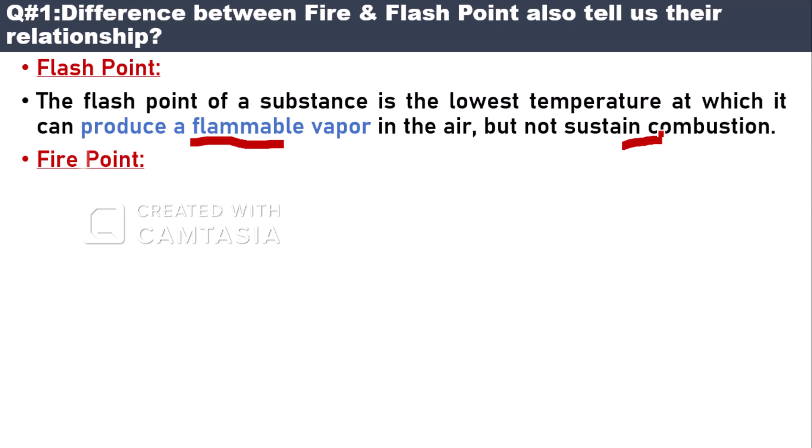The second point is fire point. The fire point is the lowest temperature at which the substance will sustain burning for at least 5 seconds. Over here we just said it will produce flammable vapor, whereas at fire point it will sustain burning for at least 5 seconds after the ignition source is removed.

The second part of the question is, what is the relationship between flash point and fire point? The relationship is generally that the fire point is higher than the flash point, indicating that the substance needs to be heated to a higher temperature to sustain combustion compared to the temperature at which it can produce flammable vapor.

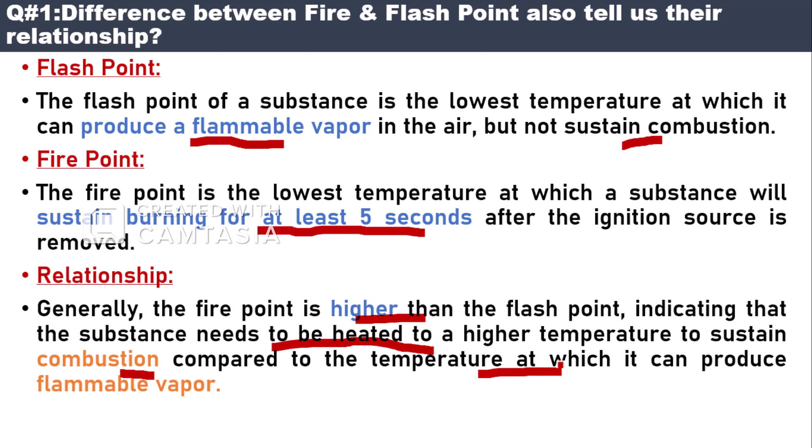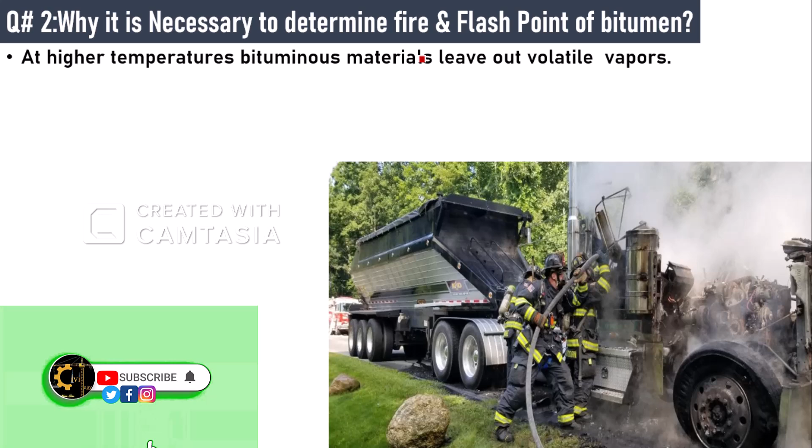Question number 2 was asked from a second person sitting on the panel: why is it necessary to determine the fire point and flash point of bitumen? You will say, sir, it is very important to determine because at higher temperature bituminous materials give off volatile vapors.

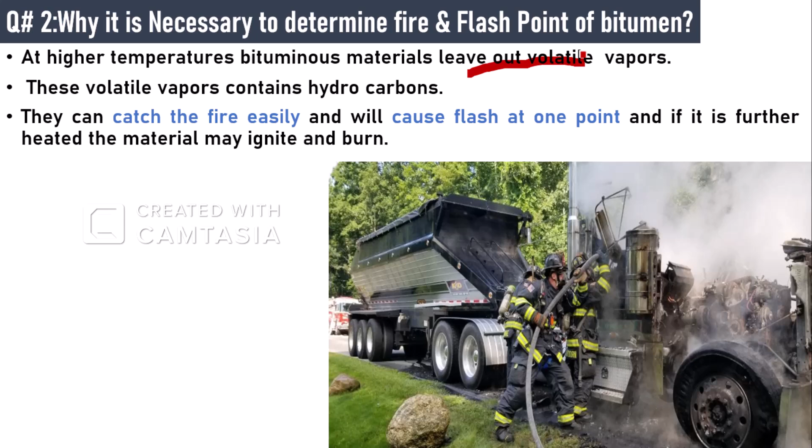These volatile vapors contain hydrocarbons and can catch fire easily, causing a flash at one point, and if further heated, the material may ignite and burn. Catching fire is very dangerous during mixing of bitumen, especially during its application. So it is necessary to recognize the safe temperature values of bitumen grades for mixing as well as for applying. These limiting values of temperature can be determined by conducting flash point and fire point tests on bitumen.

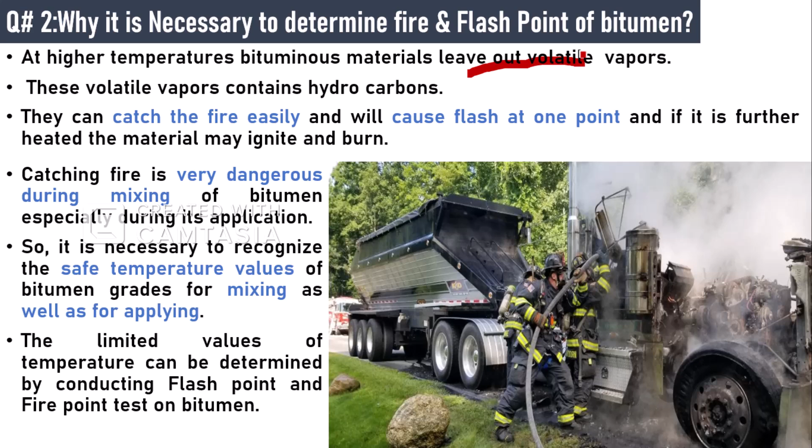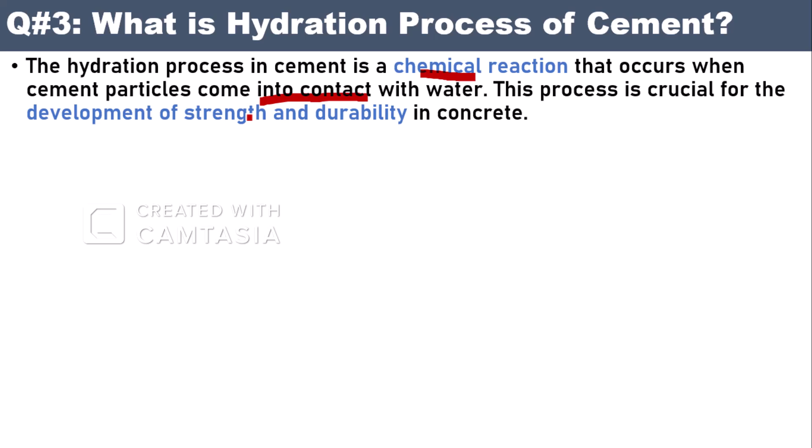Question number 3: what is the hydration process of cement? First of all, you will define what the hydration process is. The hydration process in cement is a chemical reaction that occurs when cement particles come in contact with water. This process is crucial for the development of strength and durability in concrete.

Then there was a question related to this process - question number 4: how does the hydration process help in strength gain? This is a very logical question and you will have to satisfy the person asking it. We will divide this into sub parts.

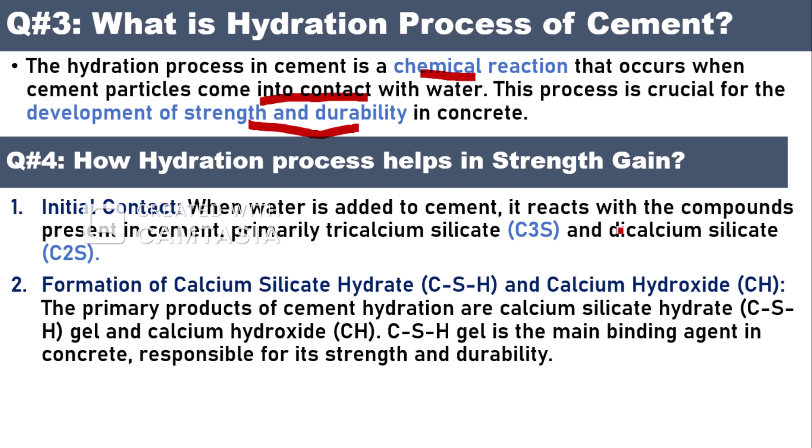The first one is initial contact: when water is added to cement, it reacts with the compounds present in cement, primarily tricalcium silicate and dicalcium silicate. Then there is formation of calcium silicate hydrate and calcium hydroxide. The primary products of cement hydration are calcium silicate hydrate gel and calcium hydroxide. CSH gel is the main binding agent in concrete, responsible for its strength and durability.

Then there is heat generation. The hydration process is exothermic, meaning it generates heat.

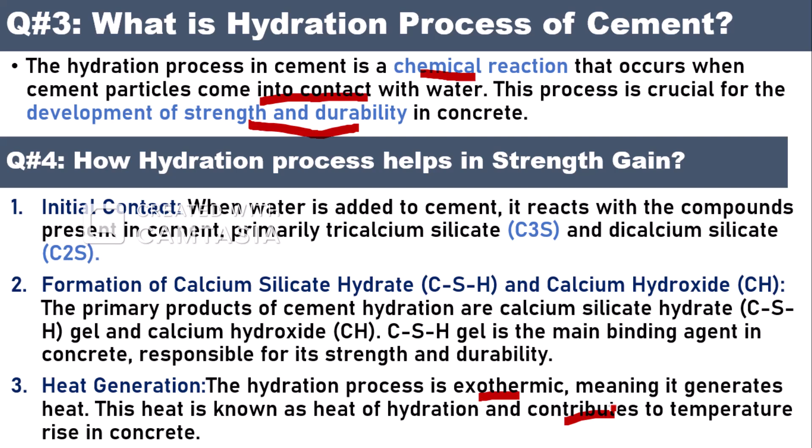This heat is known as the heat of hydration and contributes to the temperature rise in concrete. The fourth step which helps in strength gain of concrete is formation of ettringite. Ettringite has the formula Ca6Al2(SO4) along with calcium hydroxide CaOH2.

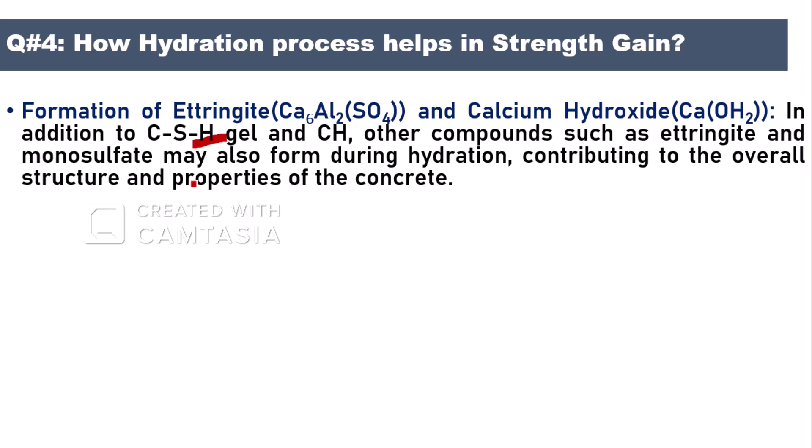In addition to CSH gel and CH, other compounds such as ettringite and monosulfate may also form during hydration, contributing to the overall strength of the structure and properties of the concrete.

Then there is setting and hardening. As hydration progresses, the concrete undergoes setting and hardening, transitioning from a plastic or fluid state to a solid state. This process is crucial for achieving the desired strength and durability of the concrete.

The person asking the question may ask, what is consistency of cement? This could be one of the questions. Consistency of cement refers to the fluidity or stiffness of the cement paste, determined by water content.

It affects workability. Another question asks about soundness of cement, which indicates the cement's ability to maintain volume after setting without significant expansion or shrinkage. It is tested by Le Chatelier's apparatus or autoclave test for durability.

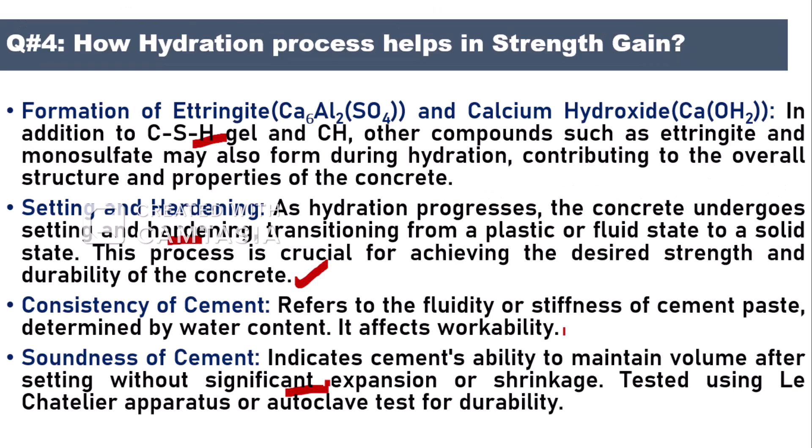The fifth question that was asked from a candidate was, what is an aquifer and its types? First, you will have to define the aquifer. An aquifer is an underground layer of water-bearing rock or sediment that stores and transmits water.

There are several types of aquifers. Then there could be a question: can you define the types of aquifers? So you will say, yes sir.

The first one is unconfined aquifer. This type of aquifer has a water table that is not confined by impermeable layers above it. It is recharged directly by precipitation infiltrating into the ground.

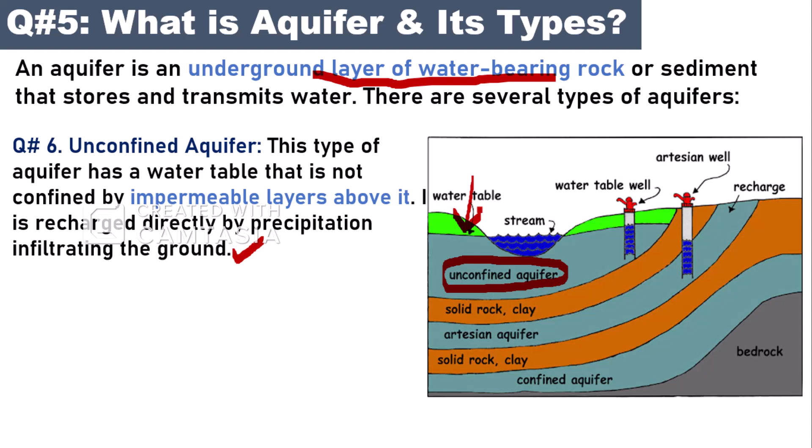Okay, unconfined. Then there could be a question, what are the other types of aquifer? You can say the confined aquifer. Confined aquifers are quite opposite to unconfined aquifers, and these aquifers are sandwiched between impermeable layers.

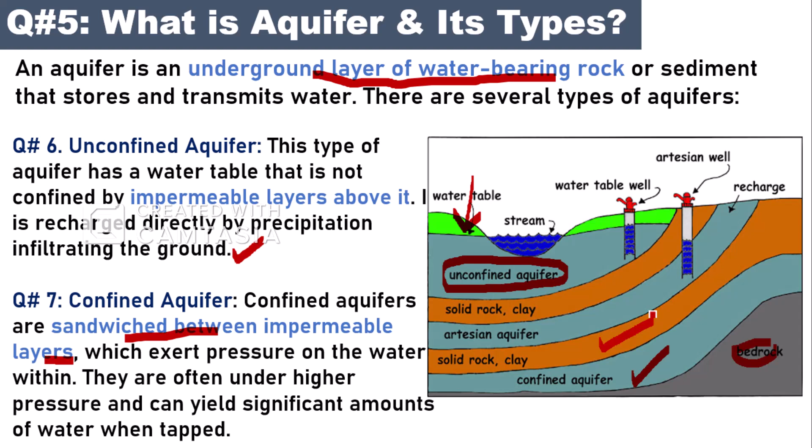As you can see over here, this is a confined aquifer, sandwiched between bedrock, a hard surface, and again there is a hard surface formed by solid rock or an impermeable layer of clay. So it is sandwiched between two impermeable layers - it is called a confined aquifer.

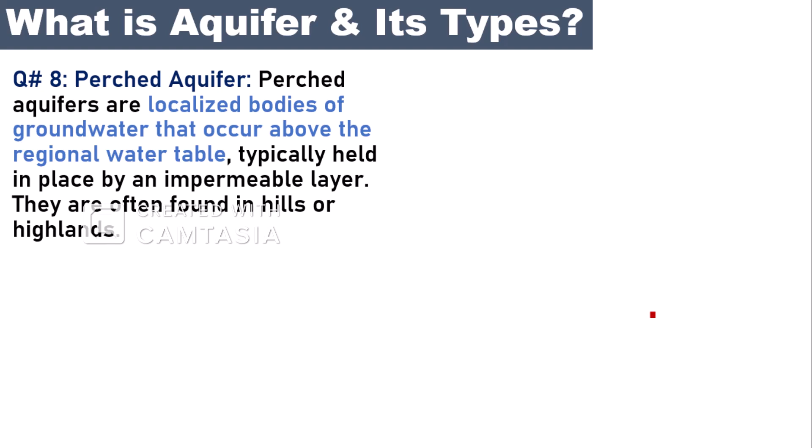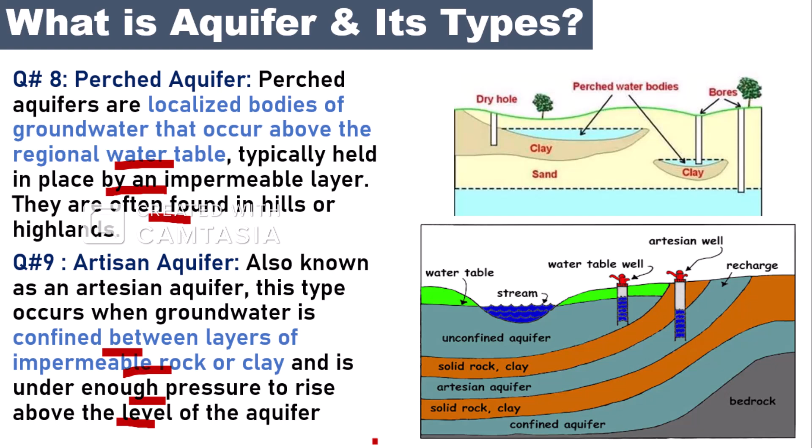Question number 9, artesian aquifer, or artisan aquifer. This type of aquifer occurs when groundwater is confined between layers of impermeable rock or clay and is under enough pressure to rise above the level of the aquifer. As you can see over here, this is an artesian aquifer, and artesian wells are also constructed to pump out the water from this level.

Question number 10, which is very unexpected: what are the types of valves and their purposes? This question was asked during an interview from an engineer. These are very important questions for civil engineers to learn. So you will answer that there are several types of valves.

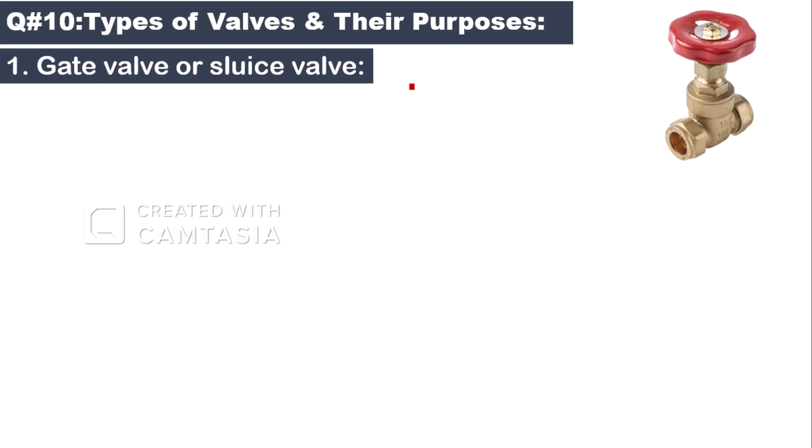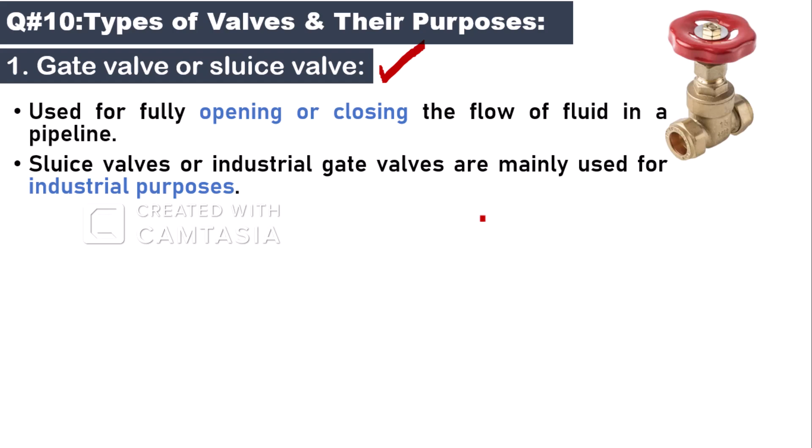Some of them are: the first one is gate valve or sluice valve, used for fully opening or closing the flow of fluid in a pipeline. Sluice valves or industrial gate valves are mainly used for industrial purposes. Their easy and simple mechanics make them one of the most used valves across various industries.

The valve operates by simply moving or lifting up. It is used along the pipe in a one-directional or bidirectional flow. When fully open, it hardly provides resistance to the flowing liquid, which is one of the major reasons why it is considered very efficient.

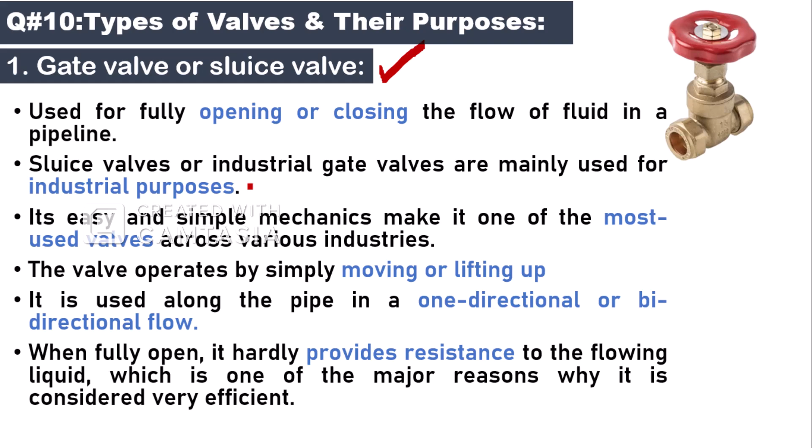The second type of valve is the air relief valve. It releases trapped air and wastewater gases from the pipeline to prevent airlocks and ensure efficient flow. The consequences of neglecting trapped air include decreased water flow and heightened energy consumption from pumping dissolved air and gases in water.

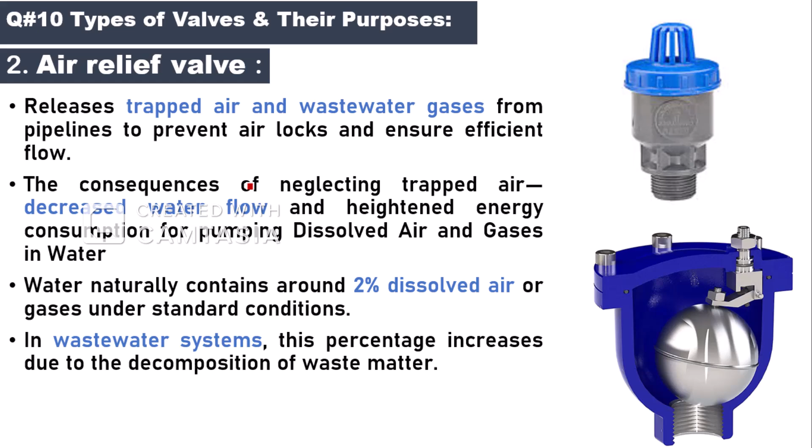Water naturally contains about 2% dissolved air or gases under standard conditions. In wastewater systems, this percentage increases due to decomposition of waste matter. Understanding the presence of these elements is very crucial for effective air valve implementation.

The third type of valve is the check valve or reflux valve. It allows flow in one direction only, preventing backflow and ensuring unidirectional flow. Check valves are also known as non-return, reflux, or one-way valves. They are used to allow flow in one direction only and prevent reversal of flow.

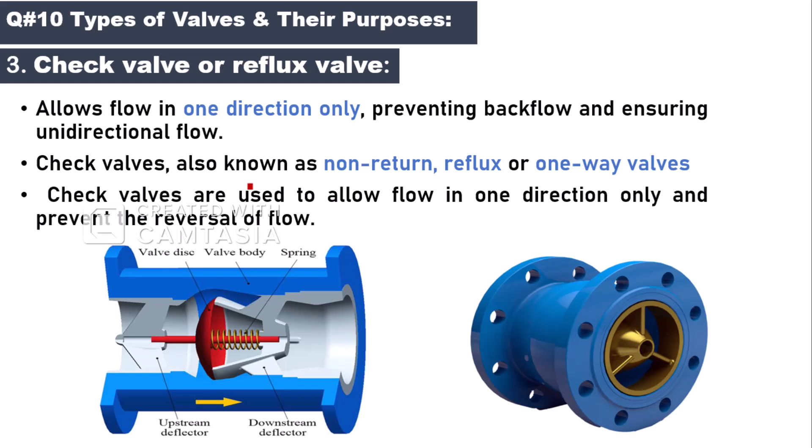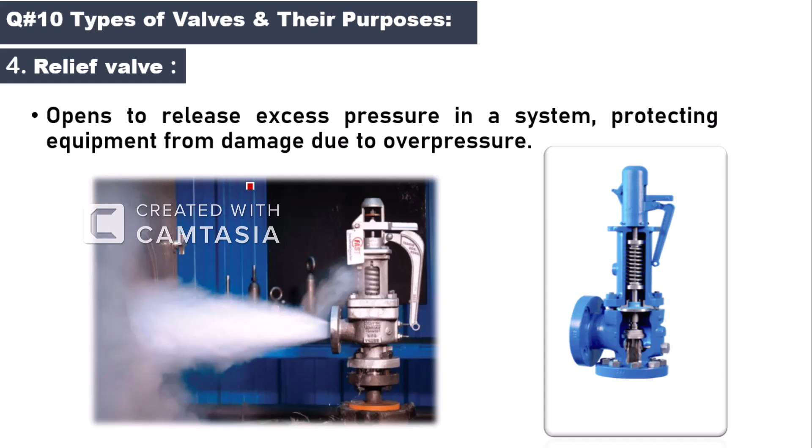The fourth type of valve is the relief valve. It opens to release excess pressure in a system, protecting equipment from damage due to overpressure.

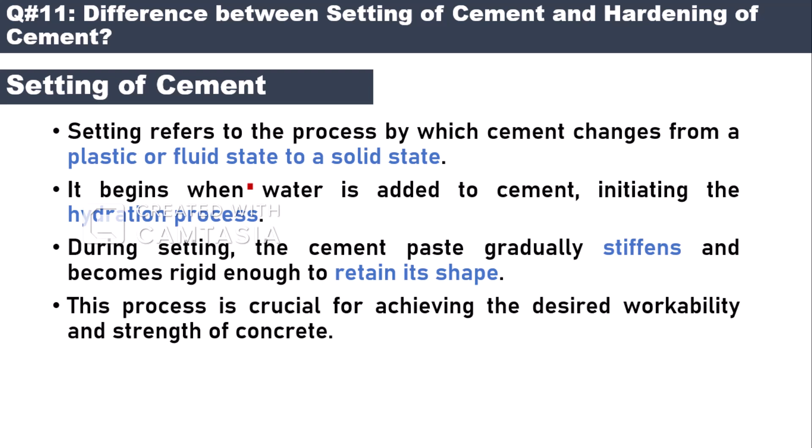Question number 11: what is the difference between setting of cement and hardening of cement? Setting of cement refers to the process by which cement changes from a plastic or fluid state to a solid state. It begins when water is added to cement, initiating the hydration process. During setting, the cement paste gradually stiffens and becomes rigid enough to retain its shape. This process is crucial for achieving the desired workability and strength of the concrete.

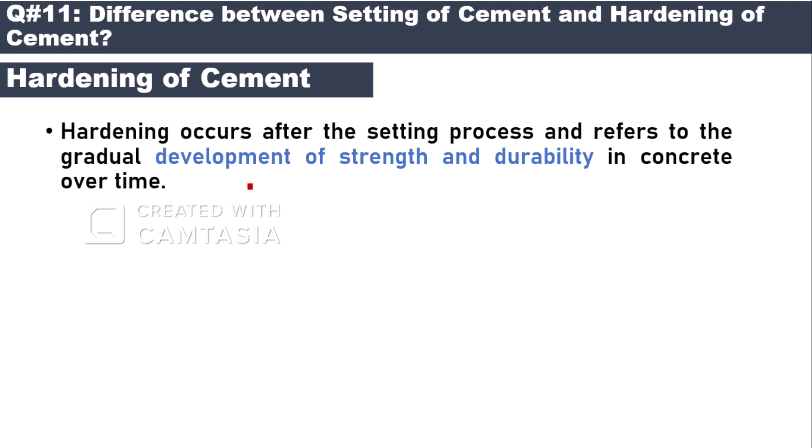What is hardening of cement? Hardening occurs after the setting process and refers to the gradual development of strength and durability in concrete over time. It involves the continued hydration of cement particles, leading to the formation of calcium silicate hydrate gel and other hydration products. As hydration progresses, the concrete becomes progressively stronger and more resistant to external forces. Hardening is a long-term process that continues for days, weeks, or even months after the initial setting of the concrete.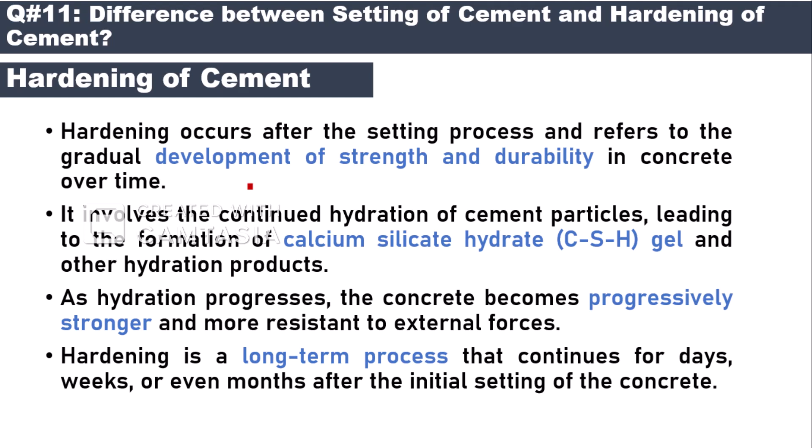Question number 12: what is the difference between seepage and permeability? First, let us define seepage. Seepage is the flow of water through soil under hydrostatic pressure, a phenomenon that occurs when water enters a soil mass and moves through it, driven by gravity or pressure gradients. Seepage can cause instability, erosion, and soil liquefaction.

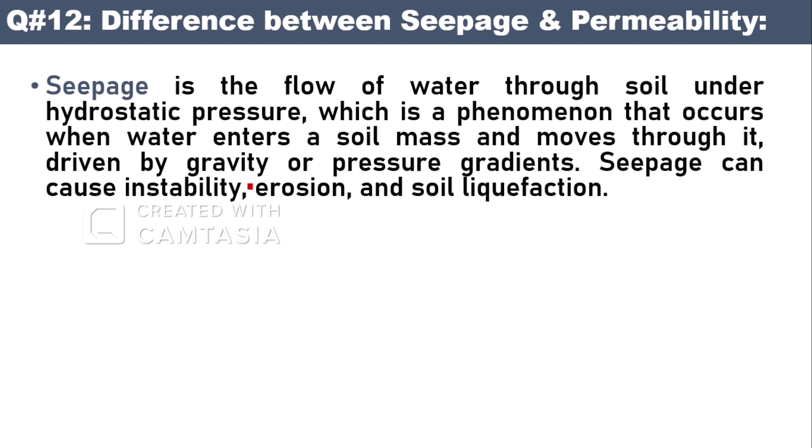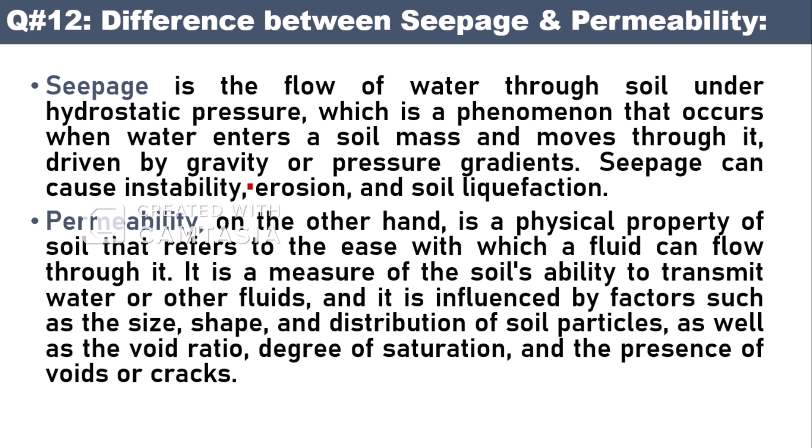Permeability, on the other hand, is a physical property of soil that refers to the ease with which a fluid can flow through it. It is a measure of the soil's ability to transmit water or other fluids, and it is influenced by factors such as the size, shape, and distribution of soil particles, as well as the void ratio, degree of saturation, and presence of voids or cracks.

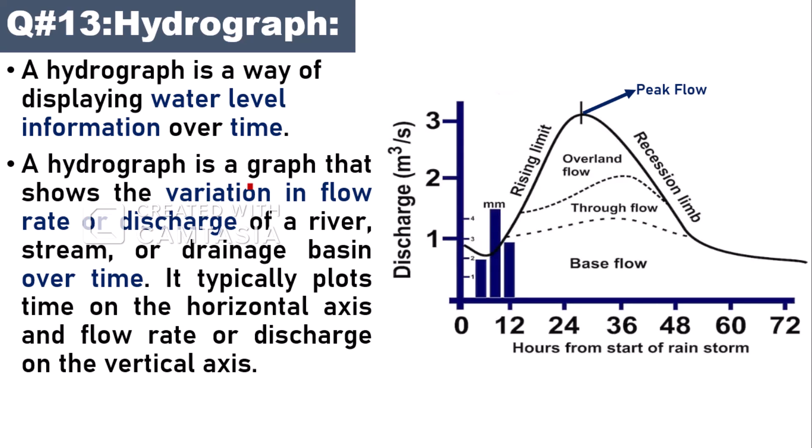Question number 13: what is a hydrograph? A hydrograph is a way of displaying water level information over time. It is a graph that shows the variation in flow rate or discharge of a river, stream, or drainage basin over time. It typically plots time on the horizontal axis and flow rate or discharge on the vertical axis.

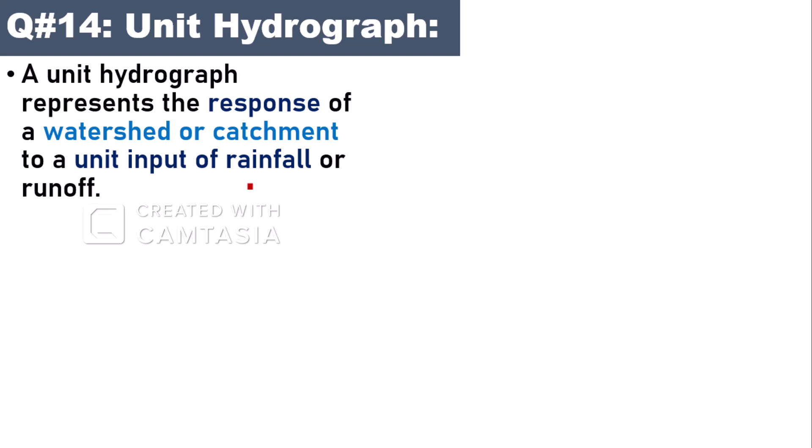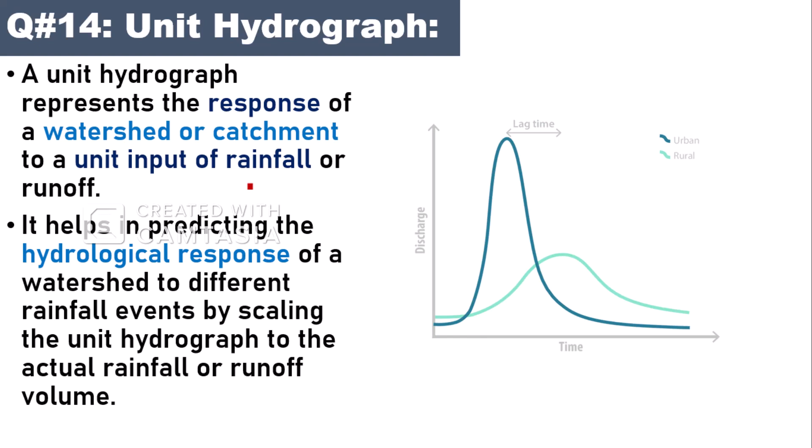What are the other types of hydrographs? One is the unit hydrograph. A unit hydrograph represents the response of a watershed or catchment to a unit input of rainfall or runoff. It helps in predicting the hydrological response of a watershed to different rainfall events by scaling the unit hydrograph to the actual rainfall or runoff volume. This is the typical shape of the hydrograph.

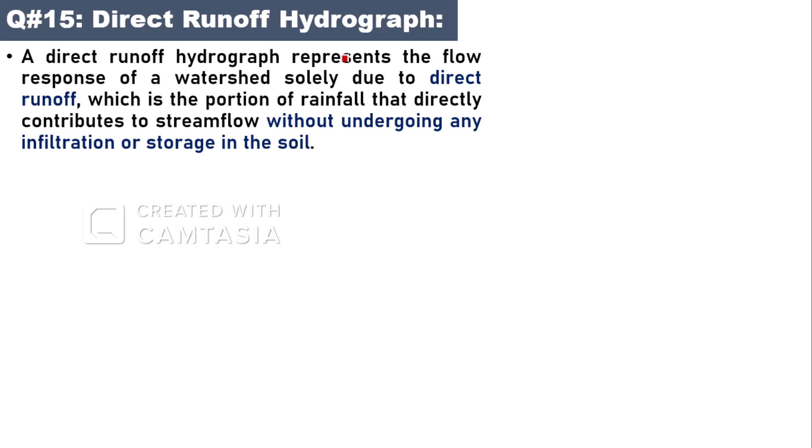Question number 15: direct runoff hydrograph. A direct runoff hydrograph represents the flow response of a watershed solely due to direct runoff, which is the portion of rainfall that directly contributes to stream flow without undergoing any infiltration or storage in the soil.

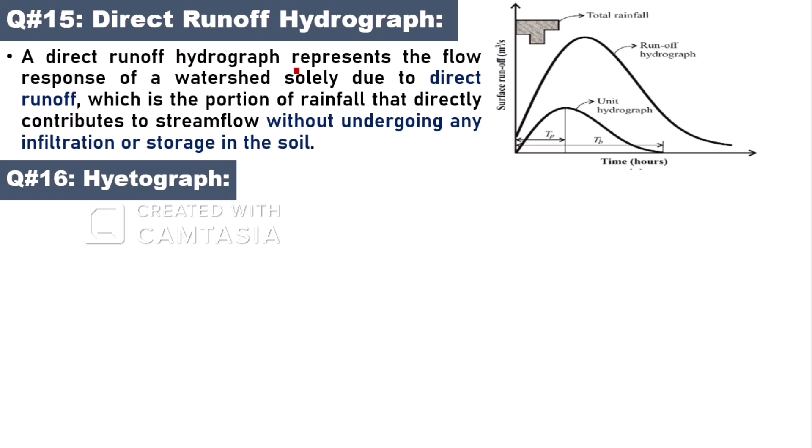Question number 16: can you define hyetograph? A hyetograph is a graph that shows the distribution of rainfall intensity over time during a storm event. It plots time on the horizontal axis and rainfall intensity on the vertical axis.

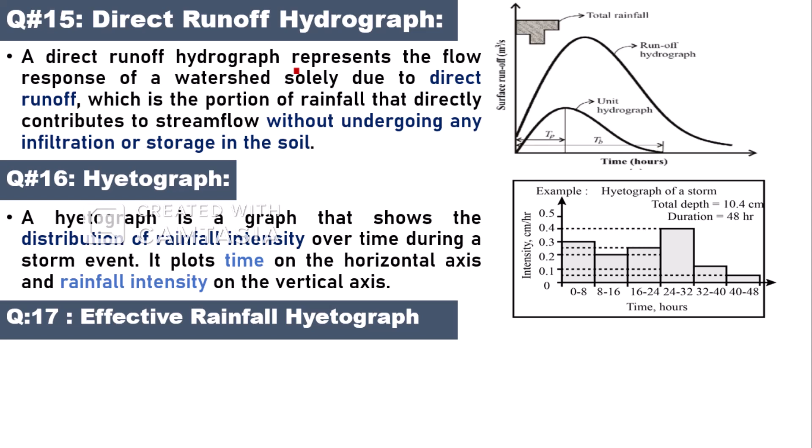Question number 17: what is effective rainfall hyetograph? An effective rainfall hyetograph is a graph that shows the distribution of effective rainfall intensity over time. Effective rainfall is the portion of total rainfall that contributes to runoff generation and stream flow after accounting for losses due to infiltration, evaporation, and other factors.